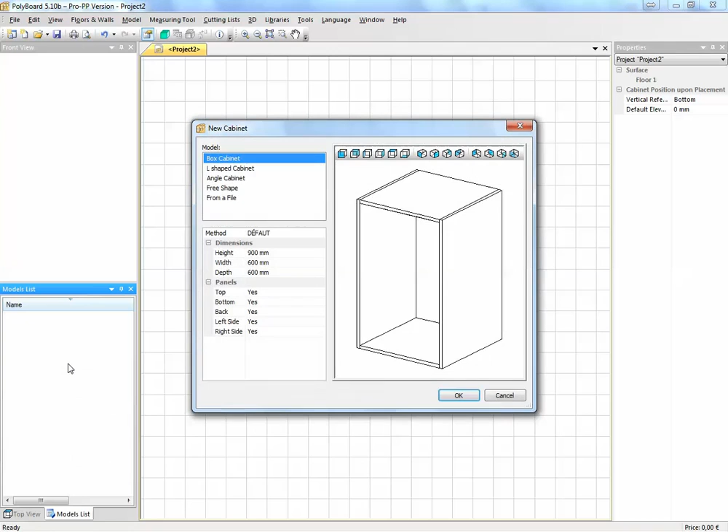So let's click on new, and let's just say we want a box cabinet in here. It comes in with a default name called 'model'. If I click twice on model, I enter into the model cabinet editing mode, and I can change this default cabinet. Let's, for instance, say that we want this to be the base cabinet.

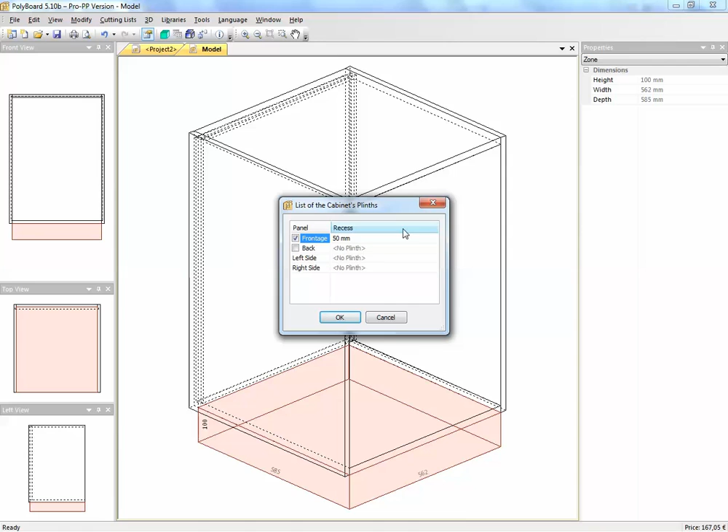So on this base cabinet, let's put in an elevation with a plinth of 100 mil. Let's put in underneath here a plinth and set this plinth back, say 50 mil, and let's put in a door, and say this door is hinged on the left side, so we have a door.

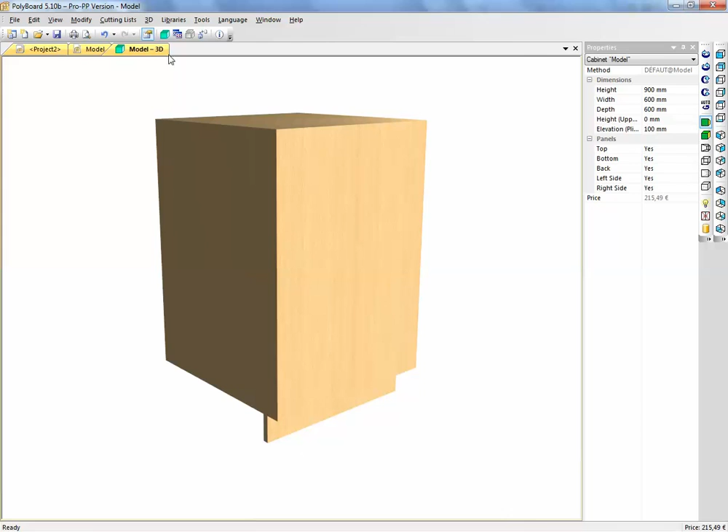If we have a look, we now have this cabinet. I can see that there's a door opening on the left hand side, hinged on the left hand side, and this is now the cabinet which, if I get out of this model edit mode, Polyboard will ask me if I want to save the design in the model, which is called model.

I can create a new model in which I'll give a name. Let's create a new model and call it the base model with door - base model with door. Or I can also save it as a cabinet file on my hard disk. But let's stay within the project mode and just create a new model with a door called base door.

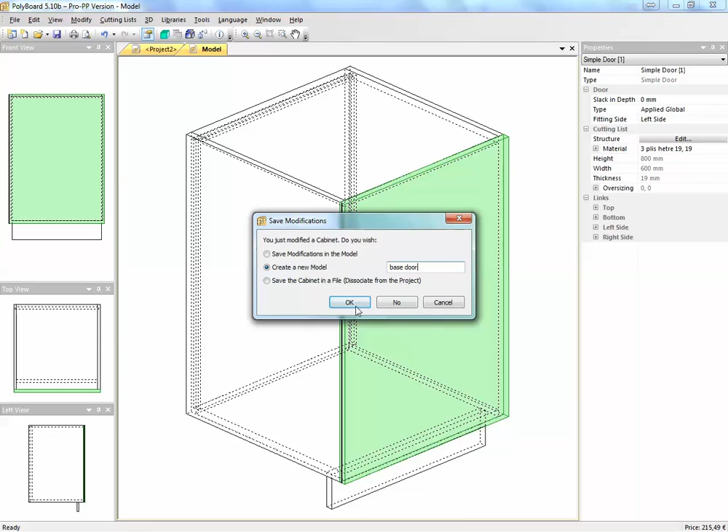Okay, and now base door appears in my model list menu. I can drag it onto the work base, the work floor. I can change my viewing angle on the work floor by clicking like this. Okay, and now I have the base with the door.

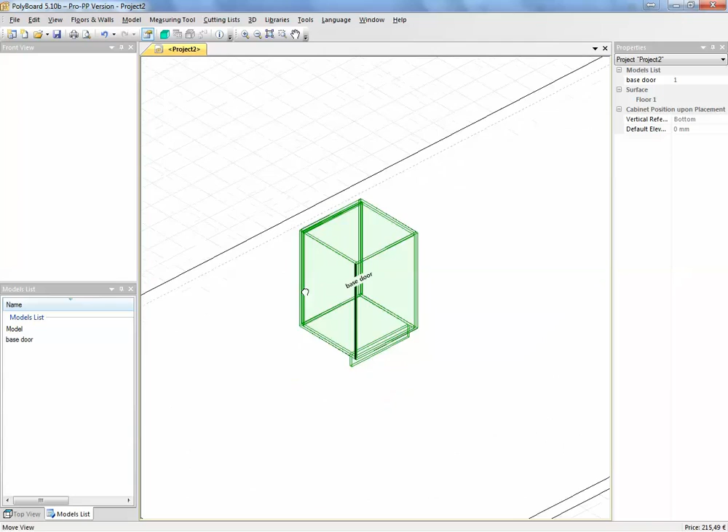Now imagine that on top of this cabinet I want another cabinet, but this other cabinet will have drawers on it. So I could take, for instance, simply the base model, click twice on model, and go into editing mode. Let's put the same model.

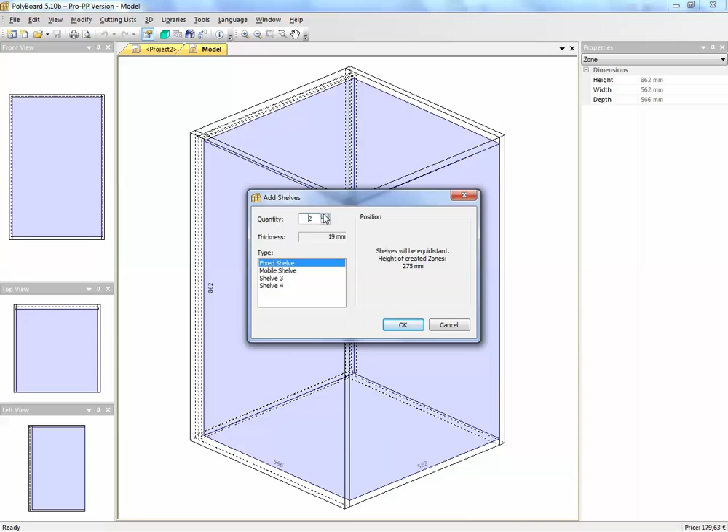This time I will add shelves. Let's say, how many shelves do we want? Let's put just 2 shelves, that would be enough - 2 shelves in this base model.

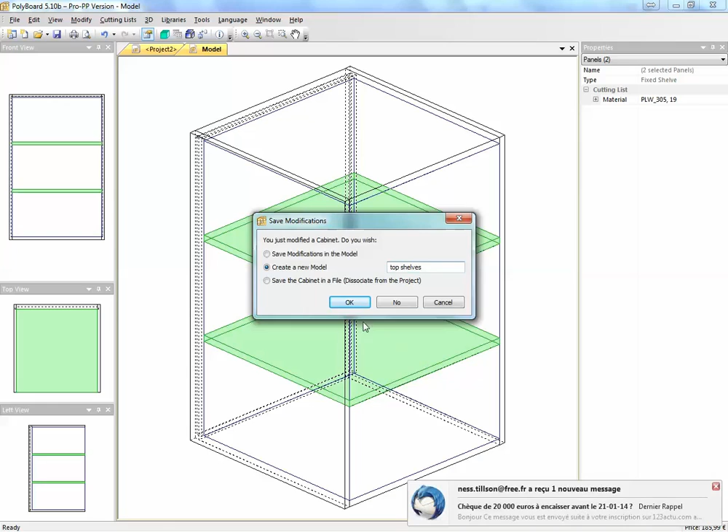Now when I exit editing mode and want to create a new model, I'm going to put 'top shelves' as a name - properly, top shelves as a name. And now I have 'top shelves' in my models list.

If I click on top shelves, I can drag it into the project window, and you can see that we have little clips that enable me to clip this particular cabinet onto different areas of the other cabinet.

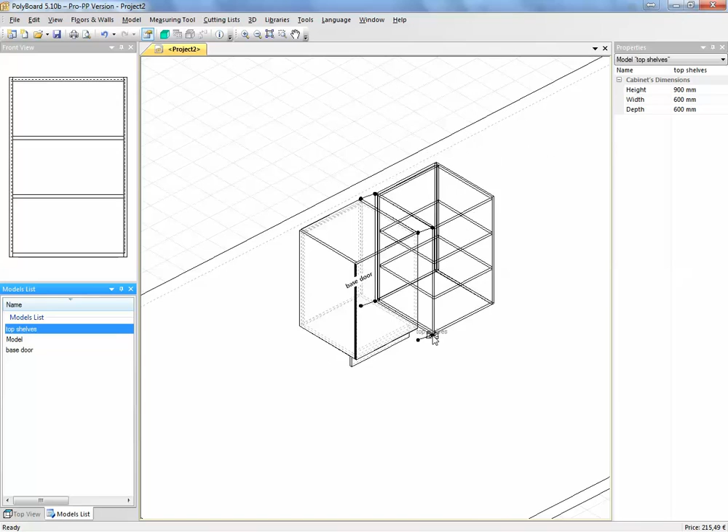On one side here, I can clip it, snap it to the corner, and I can also snap it to the top. Let's snap it to the top. Now, snap to the top. This is now our cabinet in the project mode

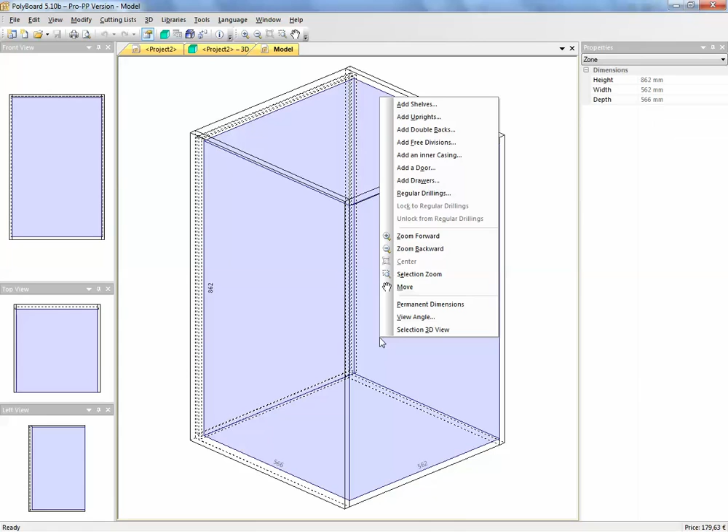with the door and shelves. Let's go back now and say that in this particular project, which is made up of several base cabinets, we also want a base cabinet with drawers. Well, I just take my original model, click twice. Let's say that these drawers, I'm going to add drawers here, and I'm going to click into a number of drawers, say 4 drawers.

Let's put on some assembly details so it looks nice. I've added my drawers here. Let's now exit model mode, create a new model and call this drawers.

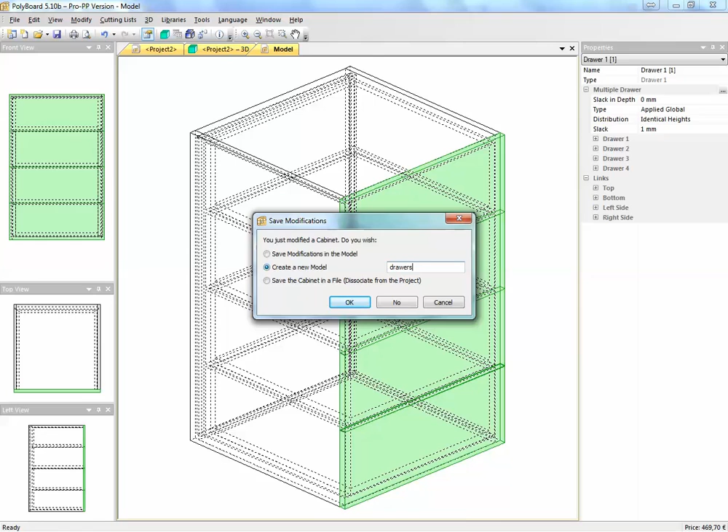Click OK. And now drawers appears in my models list. If I take models list, now the drawers the same way, I can clip it onto my model here. And we have drawers.

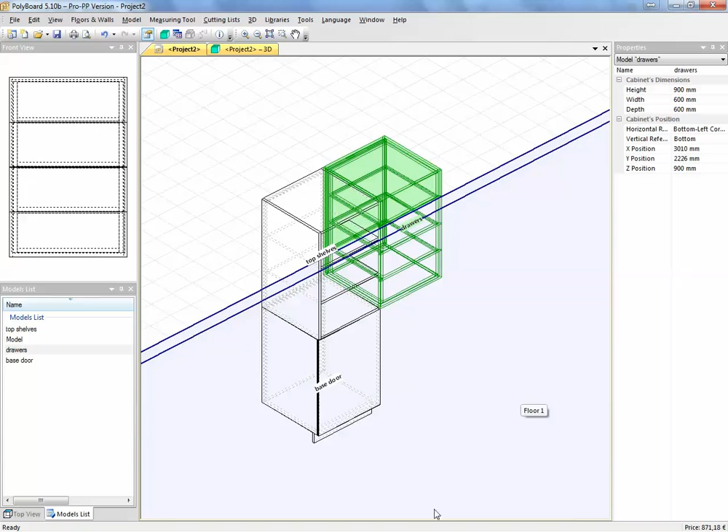I can also, for instance, clip it onto the other side here. And we will see that when I clip these drawers onto the main cluster of cabinets, we have the position of this particular cabinet. We have its position in the properties mode, the properties window here, and we can see that

the X position, while the position can be given relative to different points on the cabinet. I can give, for instance, if we say that the point on the bottom left-hand corner is our reference point on the cabinet. The position, we can give the vertical reference from the bottom, and its position here is at 900 because this bottom cabinet is actually 900 high.

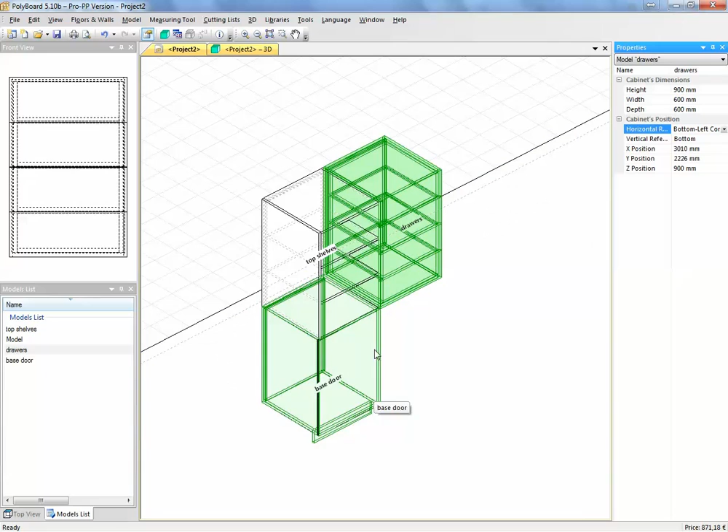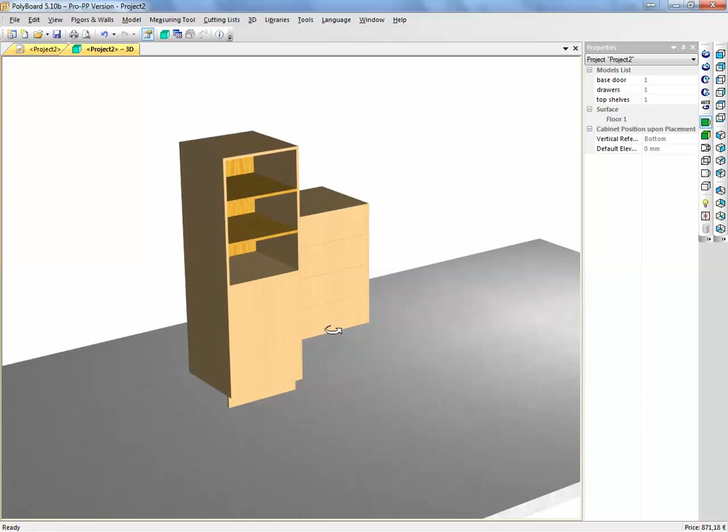But if I want to drag it down, I can actually drag it down. For instance, if I say that I don't want it 900, but I only want it 400, so that will give me here, being 400, I'll have a space of 400 millimeters underneath here, which would be a position, for instance, if I had some sort of element or something that I wanted to slide in under here, and that enables me to reposition.

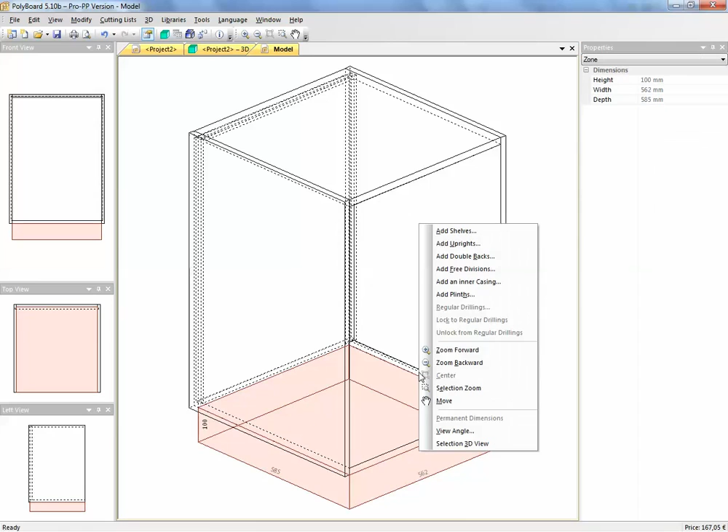I will now have, I know that I have a 400 distance here, and I want to put another module in here, and this particular module, let's say that I want it at 100 high with a plinth. Underneath I will add a plinth at the front, the same as the other one, 50.

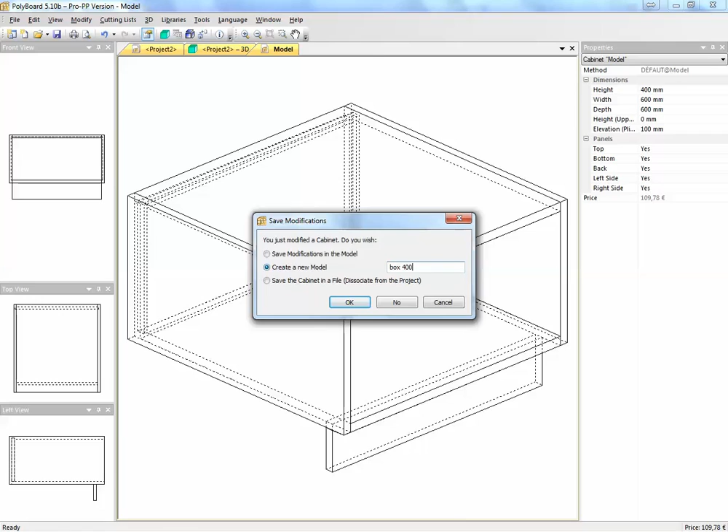Okay, but the total height we need it to be 400. So we have a box-like effect, and this particular model, I will create a new model too. I will call it a box at 400 millimeters. The box 400 appears in my models list, and I will clip it in now to this area,

and we have now different elements. I'm building up a cabinet which is made of completely different elements as I move along through the project.

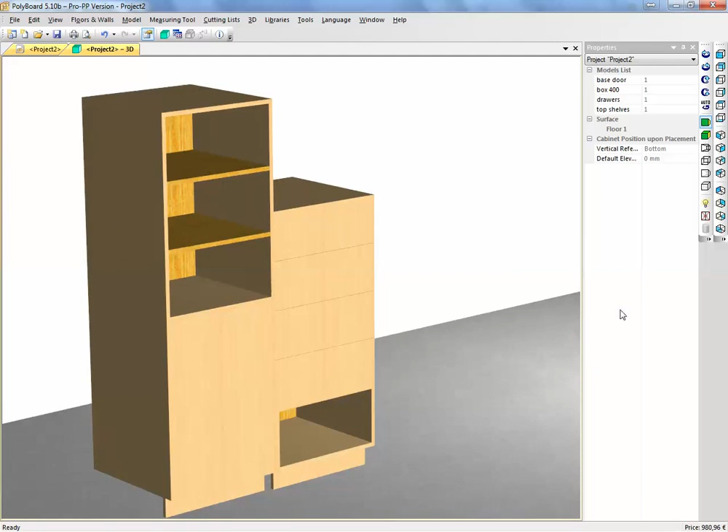So if we open the doors, so you can see how very simple this project mode enables you to build up modular projects, which are in fact completely separate cabinets and can be machined as such.

So I hope that's been of interest to you, and I hope that showed you some of the very powerful but easy and simple to use modular cabinet making in the project mode.